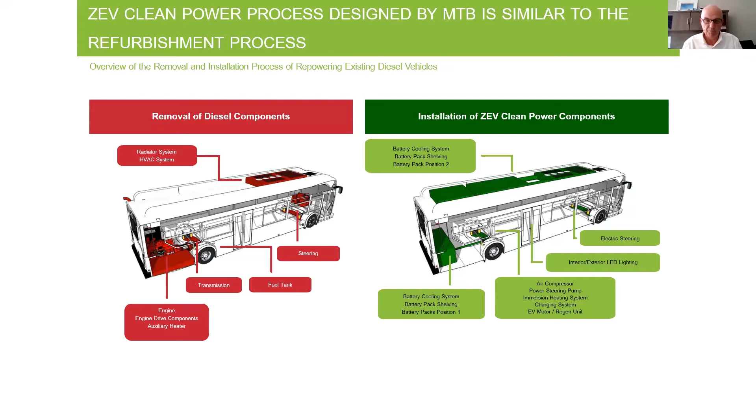So the bus ends up, again, coming in emitting GHGs from diesel combustion, and leaves in about a 6-month or less time frame emitting clean, tailpipe-free emissions. Want to go to the next slide, Naeem?

So this is a really environmentally powerful play. One of the main goals for us in this program is to help transit operators achieve their GHG reduction goals sooner. We know many of you on this call have very aggressive timelines to be GHG reduced or free, and we want to support you with that.

We think by converting some of those diesel buses that still have a lot of life left in them, we're going to help you get to your goals sooner. Again, this is repowering, and it can be in conjunction with the refurbishment program. So the goal is to extend the life of the vehicle.

This is recycling of a bus. We're going to keep the existing fleets on the road longer. This doesn't mean replacing old with new—this is just reusing and giving buses a second life.

Now, the benefits of zero emission buses for a new OEM bus or our used bus are the same. There's zero tailpipe emissions, and we're going to be able to operate cheaper because electricity is cheaper than diesel, and your maintenance costs are going to go down. So we have those same advantages that you have on a new OEM bus.

A couple of the benefits that repowering can bring: we're going to extend the bus life by up to 50%. And we can get this bus to you quickly—in less than 6 months. Comparing it to the price of a new electric bus, it can be quite a lot cheaper than buying a brand new bus.

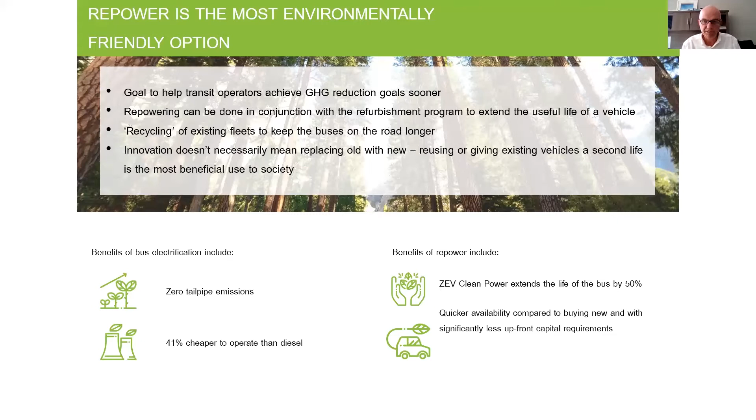Want to go to the next slide, Naeem? So the benefits of repowering are, for medium and large size transit operators, this isn't trying to replace buying new buses. This is to, as you're procuring new buses, either electric or hydrogen on the front end, we're going to clean up the older buses.

So this is helping you support that. If you're a smaller agency, this may be your first dipping your toe into the electrification side. You may only want one bus on your fleet because of budgetary constraints or internal knowledge or awareness—so this might be your first way into electrification.

One great thing is we're going to maintain the gross vehicle weight of the bus. So the weight that we take out in the diesel components will be replaced pound for pound with the electric batteries and components. We're not going to mess up the GVW, and we're not going to change any seating layout or capacity—it's going to be the exact same.

We think this is really easier on the supply chain because you're going to give us, say, your Nova or New Flyer bus that your mechanics are very familiar with, your drivers are familiar with, your riders are familiar with. We're going to give you that bus back—it's just going to have a new clean powertrain on it.

So there's not going to be a need to source a bunch of new parts or a lot of training for your mechanics on the working of that bus, or even the driver—it's going to be very similar to the old bus you gave us, just a lot cleaner. We have a much more detailed presentation we'd love to give anybody on this call.

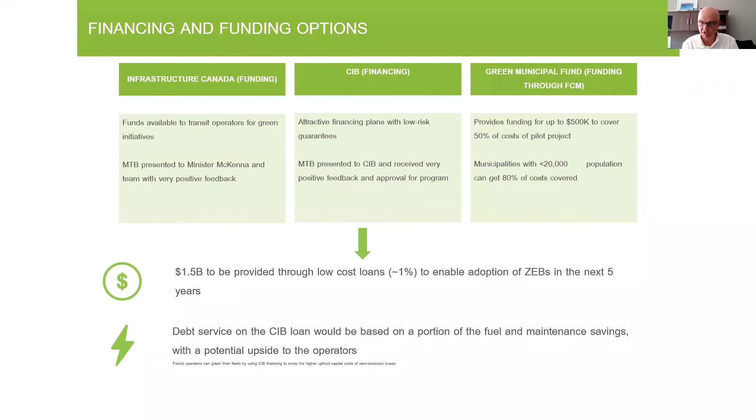Naeem, if you want to, I think my last slide's coming up.

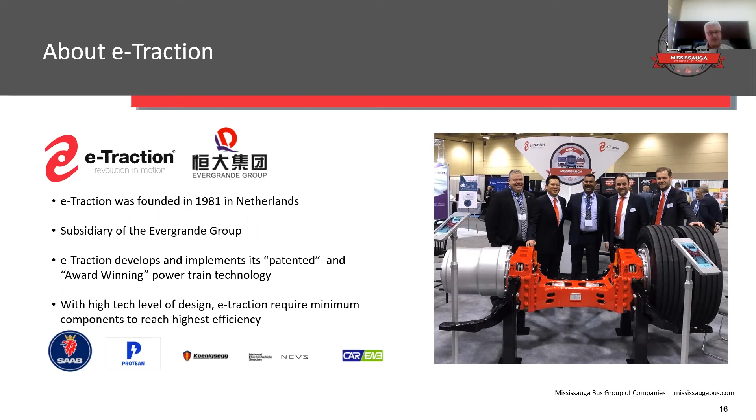There are many benefits of converting a diesel bus to an electric bus, and I would like to talk about a few of these. In a conversion from diesel to electric, you will have a low number of components, resulting in low maintenance cost. There's no friction in gears and nothing specific with oil changes — it's just the motor in the axle, an electric motor. For this, you only need to replace the bearings of the motors. No gears, as I said, low friction and high efficiency of the system.

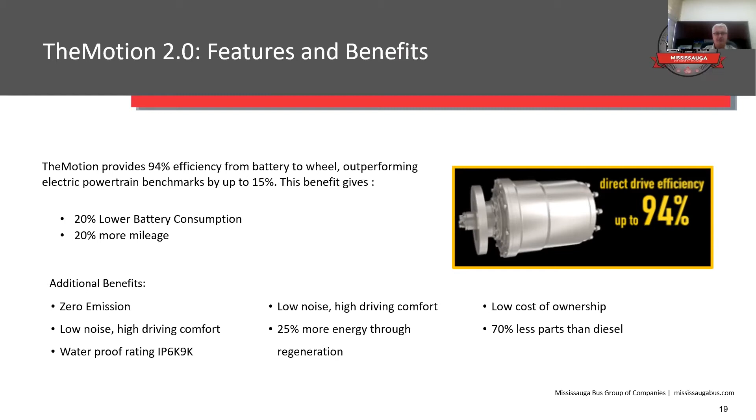The structure of TheMotion 2.0. The main component is the axle. There are some other subcomponents of the axle that you see here. The control is an intelligent powertrain control unit responsible for all driveline related functions. It controls the in-wheel motor and interacts with driver input, vehicle controller, energy system, and has smart functions that enable energy efficiency and integration with other systems in the vehicle.

TheConnect is a specially developed PDU, which is a power distribution unit, managed by the traction control and is part of the safety system of the motion. It provides the connection between high voltage DC supply and the in-wheel motor, containing all necessary functions for high voltage distribution and protection of the in-wheel motor system.

TheMotion Tool is the software designed for diagnostic and calibration of the components in the motion system. It contains full functionality to support OEMs in integrations, support field services with diagnostics, and even enables remote diagnostics. It is designed in compliance with all applicable standards and communicates via UDS and J1939 CAN communication.

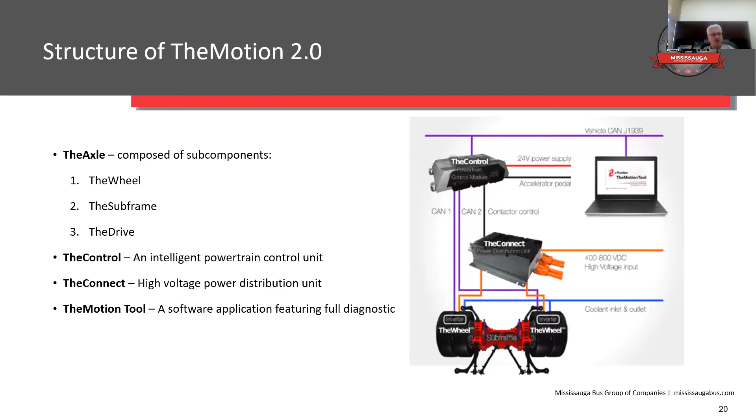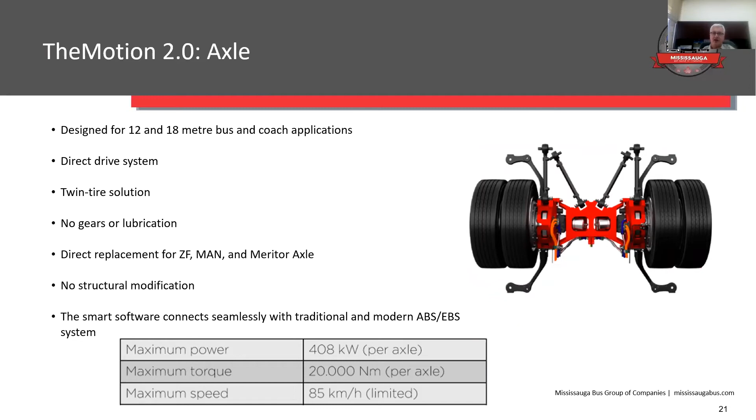Next slide, please. The axle is the main component and has been designed as a direct replacement of the existing rear axle in transit buses. No structural modification is needed to integrate the direct drive system into the existing bus structure.

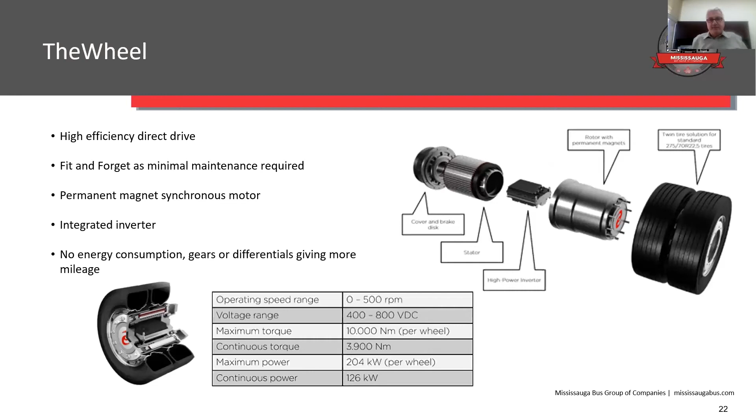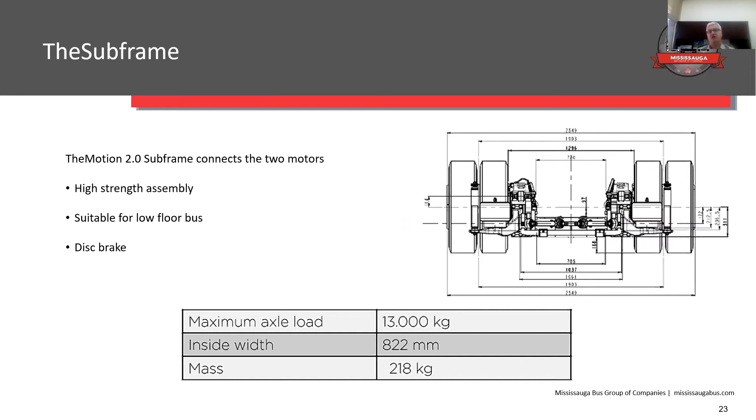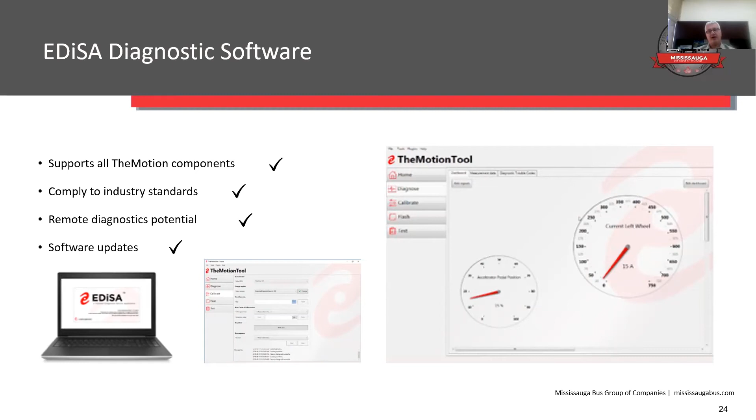Next slide. Diagnostic software. The diagnostic software supports all TheMotion components. The diagnostics software features role-based authorizations, complies with industry standards, provides remote diagnostics, calibration, provides software updates, and can also provide test procedures. Next slide, please.

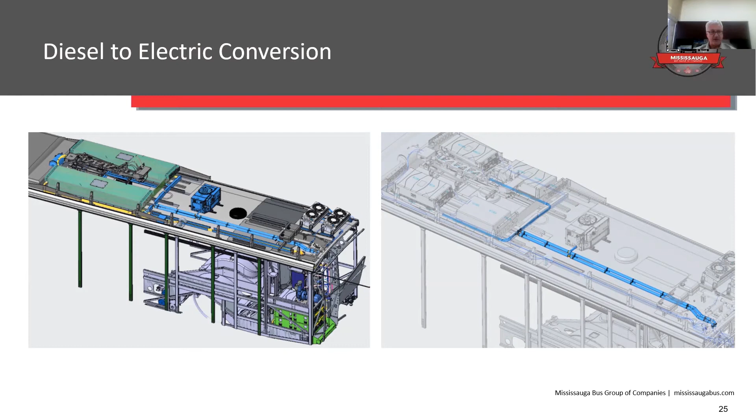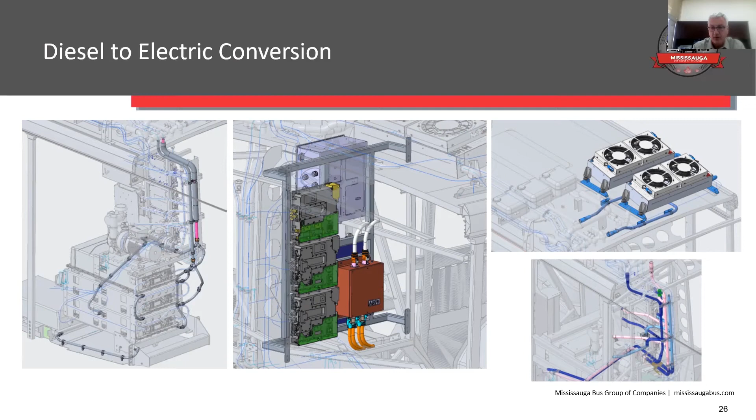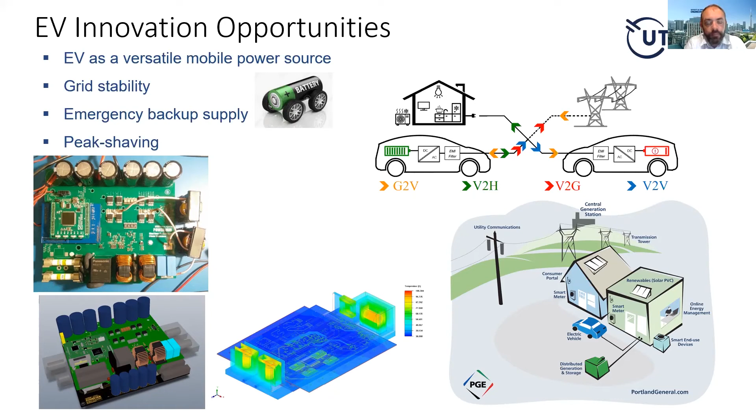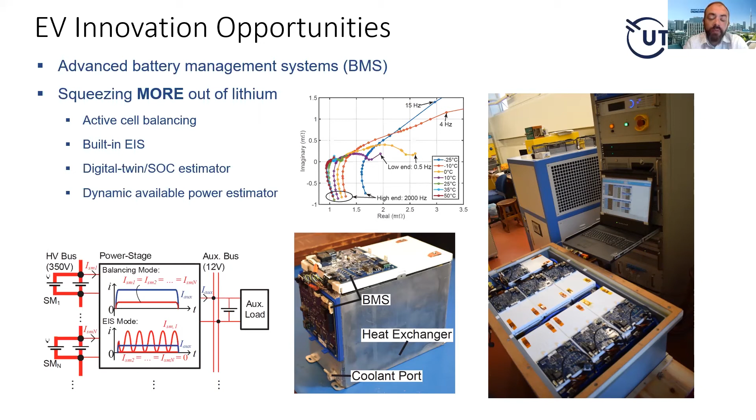You heard Gara talk about second life in terms of repowering. This is another twist on second life where, once the batteries have degraded about 20%, we think there's a useful second life as redeployment in stationary applications. The idea is that you design the battery module from day one to be repurposed for stationary use, which can help support the integration of renewables. Because the modules could come from different vehicles with different levels of degradation, we're working on algorithms to split the power mix between these modules - those more degraded will supply less power. By doing that, we can extend the overall life of a second life pack.

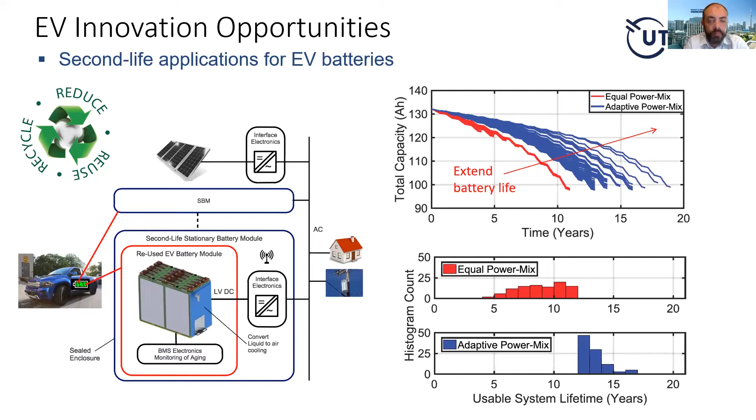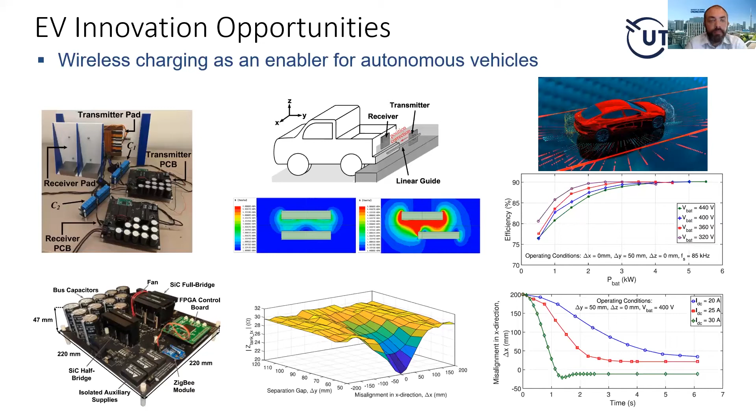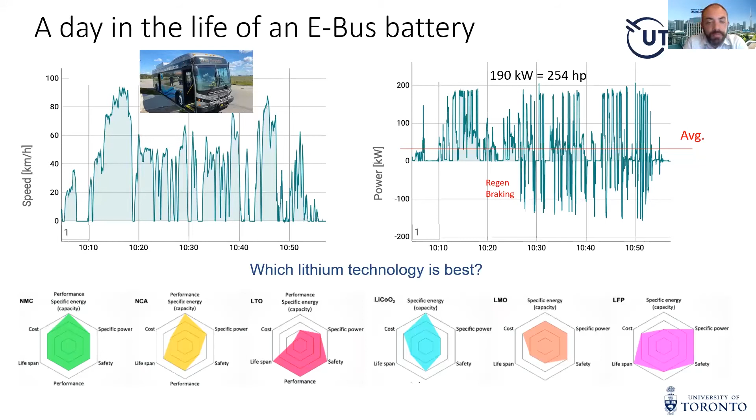So the idea is that to demystify this, you need accurate modeling of the buses to understand and not be surprised by this change in efficiency.

And thanks to, I see Mike Mackis is on the call, thanks to him for letting us into TTC to get some data. We have an online portal at Tecium where you can map out all of these parameters. It has KPIs in terms of regen and efficiency of the vehicles. You can see here histograms of the acceleration, which of course plays into the battery efficiency.

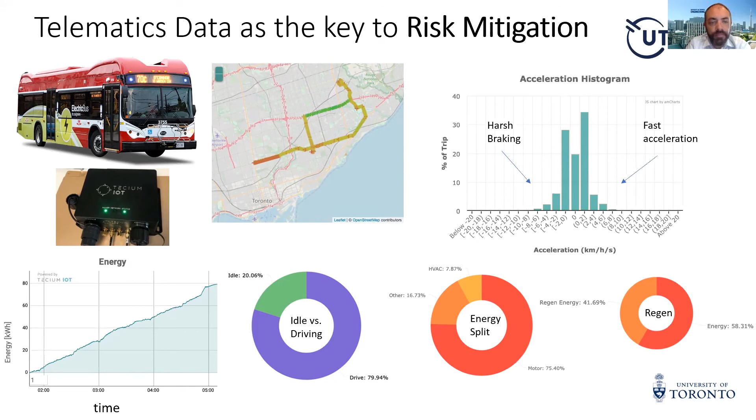One of the major trends we're seeing, not just in transit, but overall in the electrification sector, is this concept of a digital twin. Accenture, for example, has named digital twinning as one of the top 5 trends of the next few years.

The idea of a digital twin is that not only do you have an accurate model of the system, but that model is refining itself, becoming more accurate through the use of telematics. So as the bus ages and all the components are slightly changing, the twin is following that change. Over the course of the vehicle's life, you can really predict how it's going to behave in the short term and in the long term.

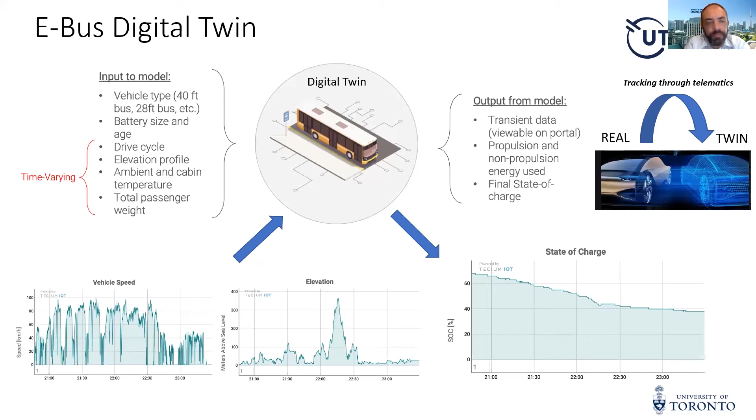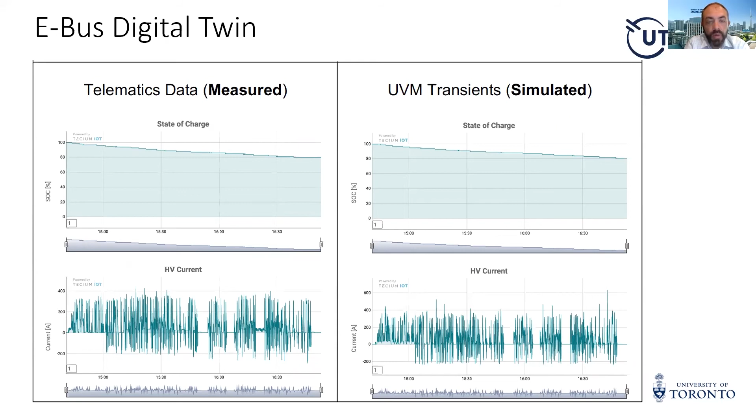The last topic here, just in a few minutes, I thought I'd bring up another perspective on repowering, in this case focusing really on the low-hanging fruit. If you think about three tiers of electrification towards zero emissions, you can buy new buses, you can repower, as we heard from MTB and Mississauga bus, or an even simpler option is just to electrify the climate control.

One of our partners at U of T wanted us to quantify what could be the fuel savings and the emissions reduction if we electrify just the HVAC system in a diesel bus.

So again, this is keeping a traditional diesel powertrain, but just electrifying HVAC.

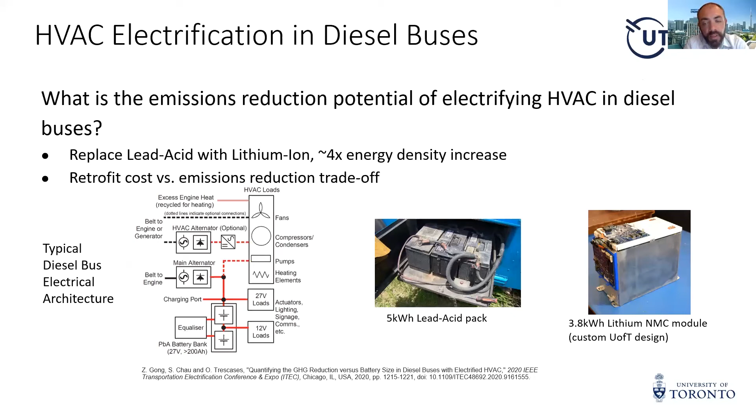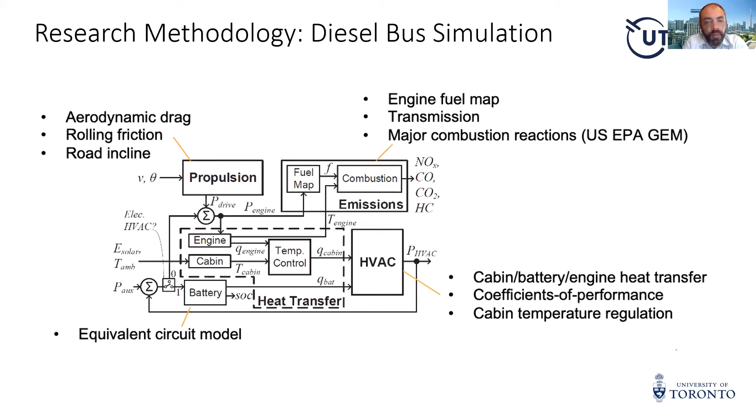We looked at two drive cycles: one called Central Business District, the other a New York bus drive cycle with a lot of stop and start, across three different climates. We asked, if we do this repower of the HVAC system in Toronto, LA, or New York, with those temperature profiles, what benefits could be gained? It's much simpler and cheaper than changing out the powertrain. We also took into account the irradiance, since the sun going through the windows has a big impact on the thermal management load, particularly in the hot and cold seasons.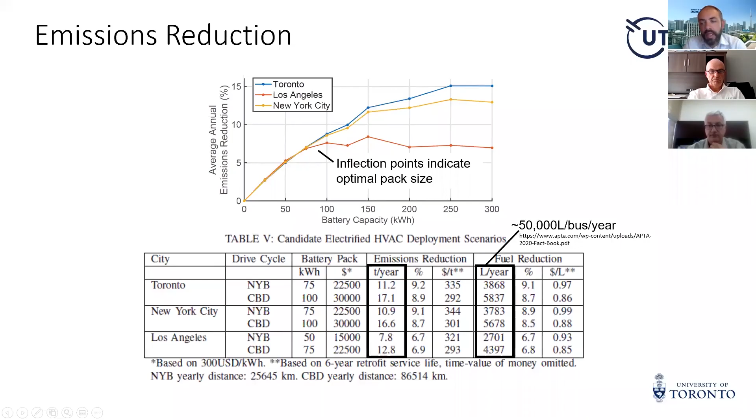But it's also very expensive from an energy point of view to keep it within the optimum spot. The OEMs have done this careful dance, and we've seen in the telematics that at lower temperature they do allow it to drop, but certainly not into negative territory.

Another factor is charging and driving habits. I mentioned regen braking can lead to lithium plating, especially at low temperature, so very harsh braking is not good for the batteries. There's been a lot of studies on how to optimize charging as well - if you can charge at low power, that's less thermal strain on the batteries, and overnight charging is fine. What we find in some trials is they're just charging at full power, not just in time. If you have a good model of the vehicle and telematics, you can tell exactly what power level you should charge to based on the particular usage pattern.

Another comment is that lithium batteries tend to degrade in a linear fashion, and then hit a knee where they start to degrade very fast. The ideal transition point to stationary application is right around when you start hitting that fast degradation. That's why they say a 20% drop in capacity means you should probably look to repower or get new batteries - not just because it's lost 20% capacity, but because after that it becomes very risky and the capacity can drop fast, and the available power may not meet your drive cycle.